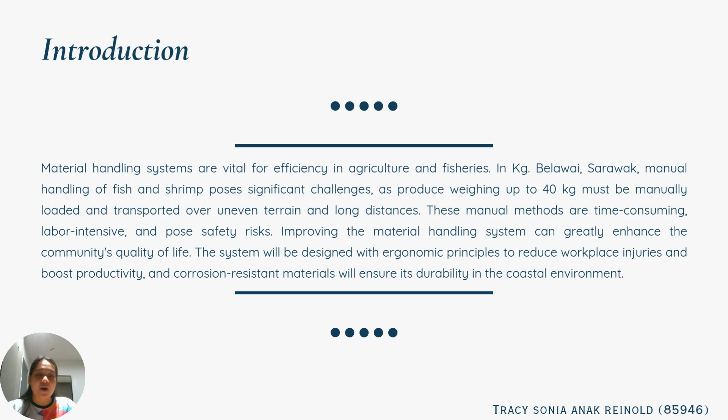The system will be made with strong, corrosion-resistant materials to handle the tough coastal environment, making it long-lasting and cost-effective. It also meets food safety standards, so the fish and shrimp stay fresh and clean. In the end, this project is about improving lives, protecting the environment, and supporting the community's economy.

In the analysis phase, we assess the current manual handling process for fish and prawns in Kampong Belawai, Sarawak. Workers face challenges like uneven terrain, long distances, and height differences. These problems reduce productivity, increase the need for labor, and create safety and hygiene concerns.

Next, we move to the strategy development phase. Our goal is to design a semi-automated material handling system to transport marine produce from boats to processing plants. To keep it sustainable and affordable, we chose cost-effective and eco-friendly materials for the design.

Finally, in the implementation plan, we propose developing a wagon to carry fish and prawns from the jetty to the processing center about 250 meters away. This wagon will integrate semi-automated and ergonomic solutions, making the process smoother, safer, and more efficient. The system will not only improve productivity, but also enhance worker safety and reduce the physical strain involved in transporting marine produce.

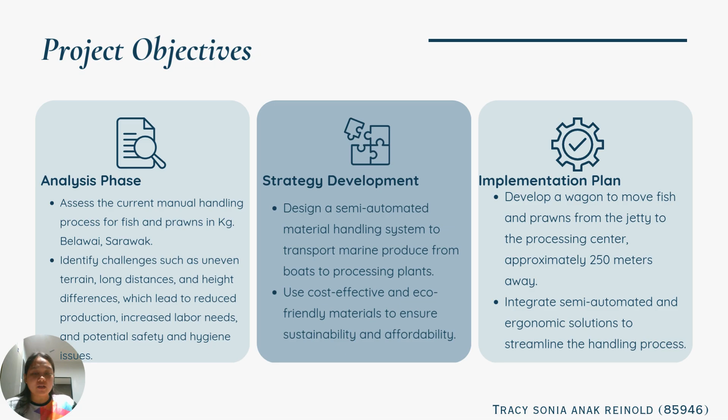So now let us proceed to the force analysis of the wagon. This is the calculation of force applied that we need to move the wagon. Based on the calculation, we need to do three different types of calculation based on three different types of surface: sandy surface, concrete surface, and tar surface.

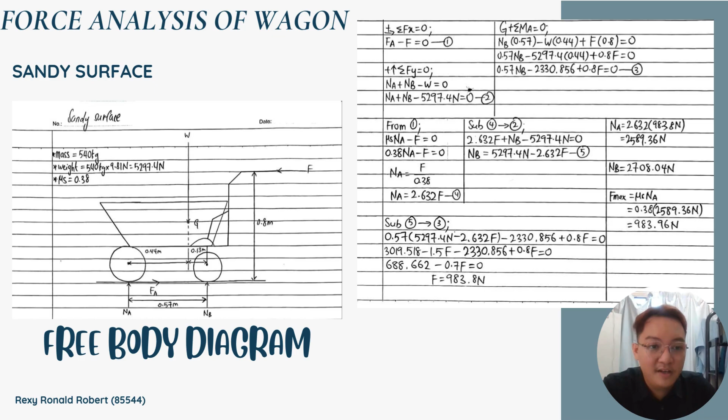After getting the force applied, we can calculate the normal force on point A and point B. We also need to calculate the maximum force applied, using the formula coefficient of friction times normal force at point A. Based on engineering theory, if the force applied on the wagon is lower than the maximum frictional force, it cannot overcome the tendency of the wagon to remain static. So for sandy surface condition, the wagon is unable to overcome the maximum frictional force, hence it will have trouble to move.

Now let us proceed to the concrete surface calculation. By using the same formula and steps, we calculate the concrete surface by changing the coefficient of friction to 0.9. We can see that the applied force is indeed higher than the maximum frictional force. So for concrete surface condition, the wagon is able to overcome the maximum frictional force, hence it will have no trouble to move.

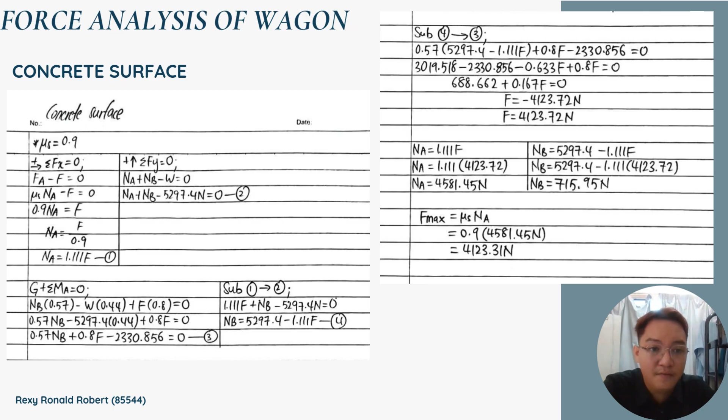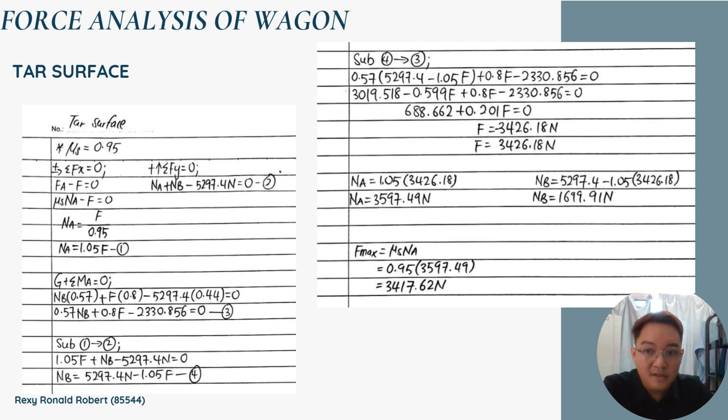Lastly, for the tar surface, same as before, we use the same calculation and formula, but change the coefficient of friction to 0.95. Same as the concrete surface, the applied force on the tar surface is indeed higher than the maximum frictional force. So for tar surface condition, the wagon is also able to overcome the maximum frictional force, hence it will have no trouble to move.

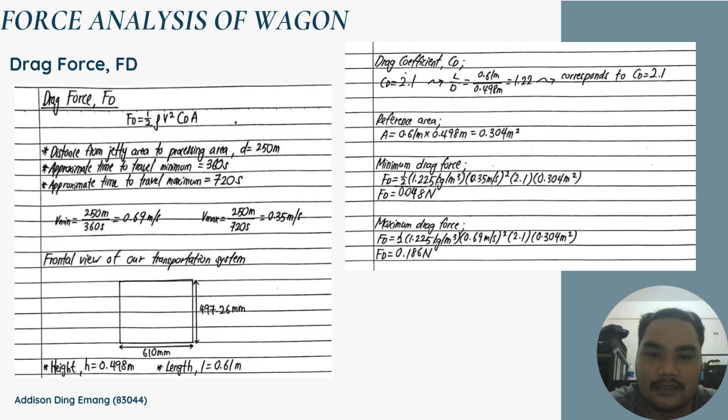We can look for the corresponding drag coefficient of our wagon from the dimension of the frontal area, which is 2.1. We can calculate the minimum and maximum drag force using the formula Fd equal to 1 over 2 rho v squared Cd A. The minimum drag force is 0.048 Newton, whereas the maximum drag force is 0.186 Newton.

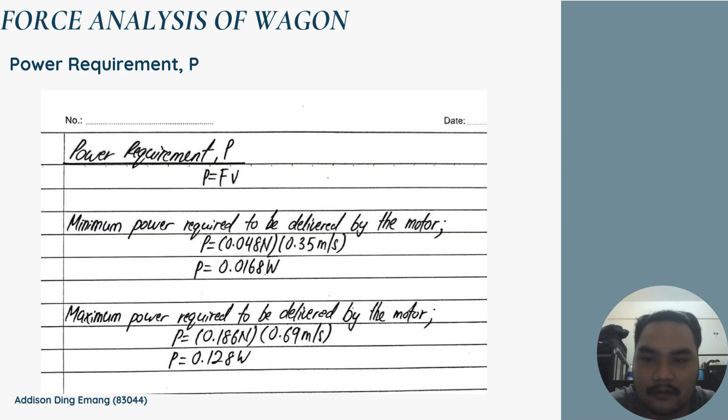Since we are going to install an electric motor for our wagon, we need to calculate the power requirement. Using the formula P equal to Fv, or power equal to force times velocity, the minimum power required to be delivered by the motor is 0.0168 watt, whereas the maximum power is 0.128 watt.

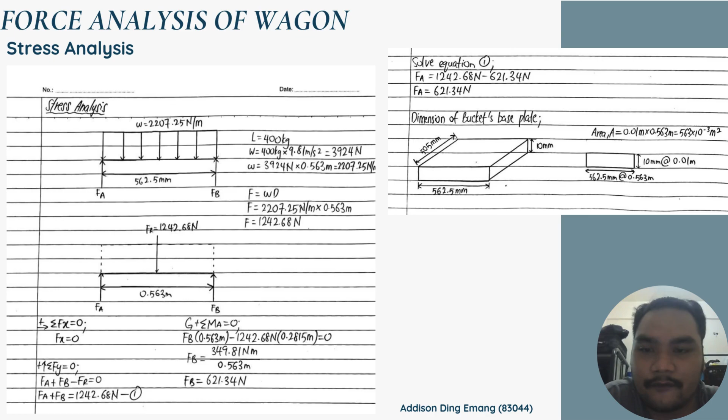So the force is 1,242.68 Newton. Using equations of equilibrium, we can look for the corresponding force at A and B, which is 621.34 Newton. And now calculating for stress, we just divide the force with the area, and it is 2.21 kilopascal.

Since the bucket is decided to be made of aluminium 2014 T6, the yield strength is 414 MPa. The group decided the safety factor of the wagon is to be 2. So we divide the yield strength with the safety factor, and we get 207 megapascal for the working stress. Since the stress is less than the working stress, the design is safe to be used.

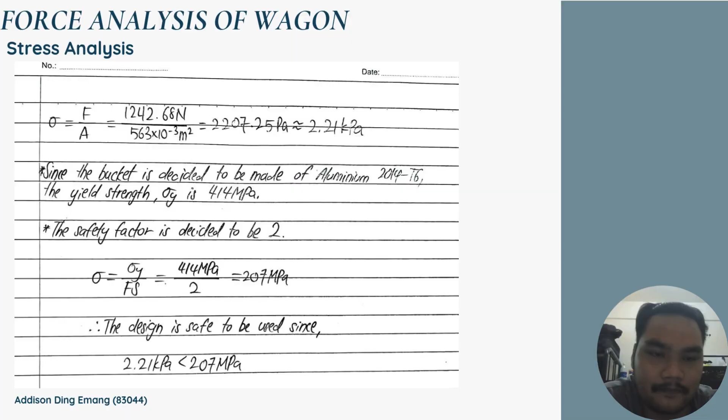The TRIZ diagram and component analysis focuses on identifying and analyzing the components of the material handling system and their interaction with the external environment. The system components consist of the wheel, wagon bed, handle, motor, and frame, which form the essential parts of the material handling design.

Each of these components plays a critical role in ensuring the system functionality. For example, the wheel is essential for mobility, the wagon bed supports the load, the handle provides control, the motor offers power for automation, and the frame provides structural stability. These components work together to achieve the overall goal of efficiently transporting loads.

The external elements or environmental problems that affect the system performance are represented by the supersystem components, which include moisture, sand, roads, and rain. For example, moisture and rain can cause corrosion or reduce the durability of components, while sand and uneven roads can increase resistance and impact mobility.

The interaction between the system and the supersystem components highlights the need for a robust and adaptable design. Finally, the product represented as the load is the ultimate outcome that the system aims to transport effectively. The diagram emphasizes the need to align the system components with the external factors to ensure safe, efficient, and durable load handling under varying environmental conditions.

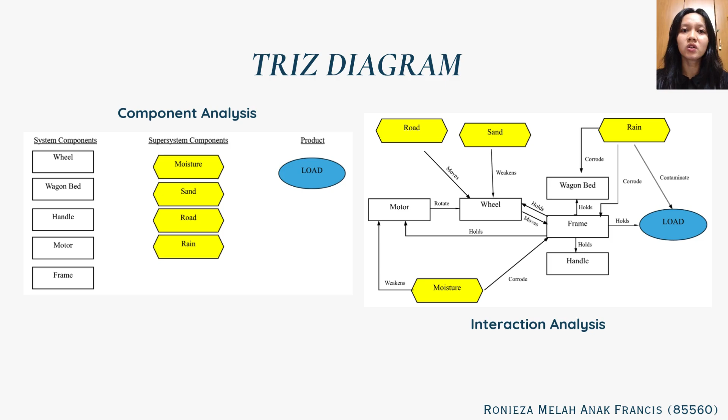This analysis provides the groundwork for creatively enhancing the material handling system by choosing suitable materials, optimizing component design, and addressing outside obstacles.

This diagram illustrates the functional relationship and potential weaknesses within a wagon system, highlighting both useful and harmful interactions. The system consists of key components such as the motor, wheel, frame, handle, wagon bed, and load.

The motor rotates the wheel, enabling movement, while the frame holds the wheel, wagon bed, and handle. The load is supported by the frame.

External factors like road, sand, moisture, and rain impact the system efficiency. The road facilitates movement, while sand weakens the wheel. Moisture and rain introduce corrosion risks, affecting the wagon bed, frame, and load. Excessive moisture weakens the motor, while rain contaminates the load.

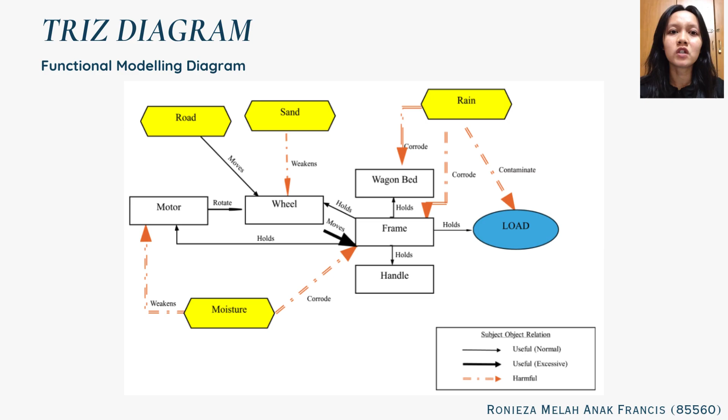The diagram differentiates between normal useful functions, excessive useful functions, and harmful effects using different line styles and arrow indicators, providing a clear visual representation of the system limitations.

Next, the diagram presents a structural breakdown of why the wagon's load capacity cannot be sustained. The root causes are divided into 4 key issues: frame breakdown, wheel failure, wagon bed instability, and motor inefficiency. Frame breakdown occurs due to weak structural integrity or excessive vibration, which may stem from an insecure frame that does not conform to other components.

Wheel failure is attributed to an insufficient number of wheels to support the load and the penetration of small particles into wheel bearings, impairing performance. The wagon bed is unable to sustain the load due to a lack of structure, sturdiness, and excess water accumulation with the produce.

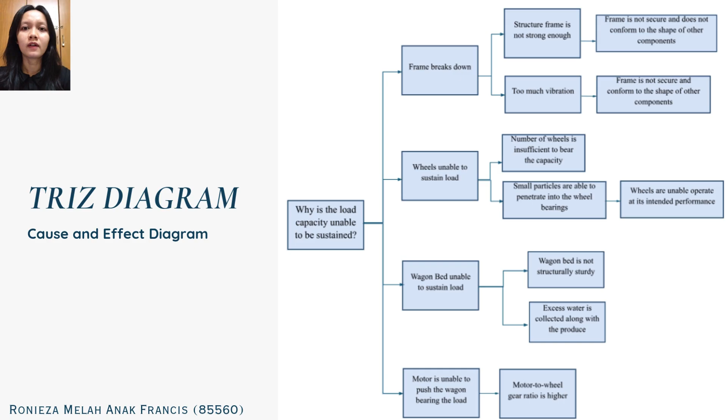The House of Quality (HOQ) diagram is a systematic tool used to translate customer requirements into technical features for a product or system. In this particular HOQ diagram, the focus is on designing an efficient material handling system that aligns with the needs and expectations of customers while addressing technical constraints.

These requirements were prioritized based on customer input, with the highest priority given to the product's dimension, followed by cost efficiency, weight, and robustness. These priorities guide the development process to ensure the design meets the most critical customer expectations.

The technical requirements, Room 2, provide a set of measurable attributes, including the product's dimension, weight, life cycle, cost efficiency, eco-friendliness, and resistance to corrosion. These features are directly linked to customer requirements and serve as a foundation for the design process. Each technical requirement was developed to ensure the system performs optimally under varying conditions.

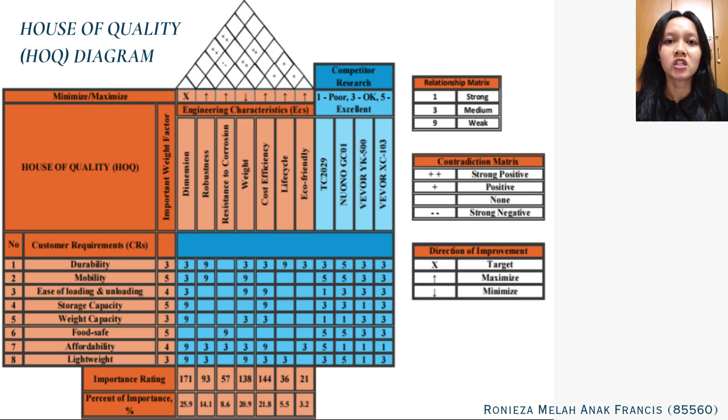The prioritization of features such as dimension, cost efficiency, and weight ensures the final design is robust, cost-effective, and adaptable to various environmental challenges. After reviewing all 5 designs, we have chosen Concept Design 1 because it offers the best combination of simplicity, reliability, and practicality.

The straightforward design means it's easy to manufacture and has fewer parts that can fail, making it reliable for daily use. It's also low maintenance, with quick, simple repairs that don't require special tools.

The design is stable, even when carrying heavy loads, which is great for uneven terrain. Plus, its lightweight structure makes it easy to handle, even in tight spaces, ensuring it's usable in different environments.

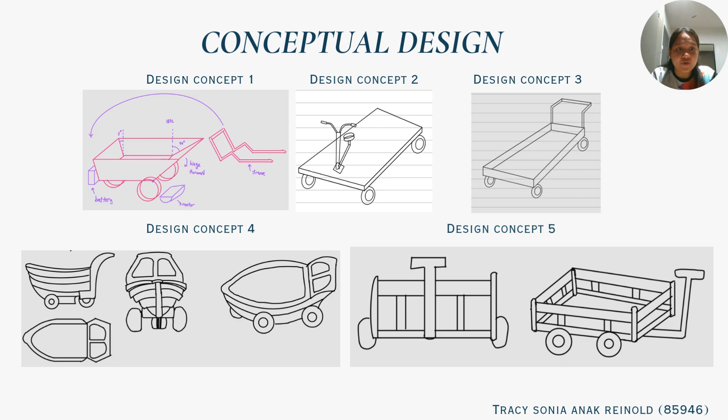While the open structure does expose the load to weather, this can be managed with covering or containers. Overall, Concept Design 1 stands out for its ease of use, stability, and reliability, making it the best choice for our needs.

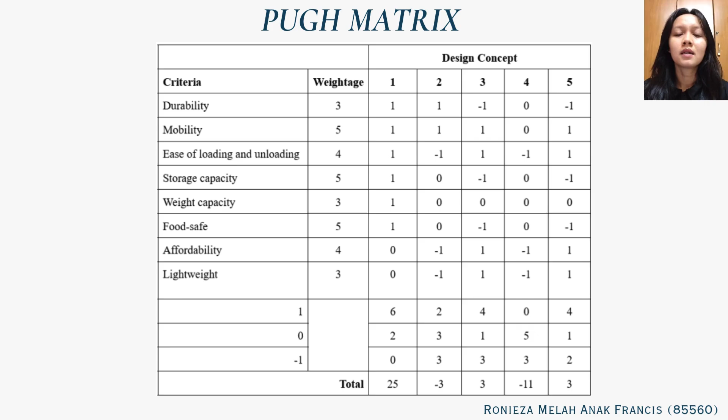From the analysis, Design Concept 1 is the best choice as it outperforms other alternatives in most criteria, making it the most optimal selection for further development. Although Design Concept 3 and 5 perform reasonably well, they may require certain refinements. Meanwhile, Concept 2 and 4 are not recommended as they have negative performance scores, indicating they do not meet the desired requirements effectively.

So as an overview, the final design is a motor-assisted wagon that operates similarly to a wheelbarrow, whereby it is designed to be pushed from the back by an operator.

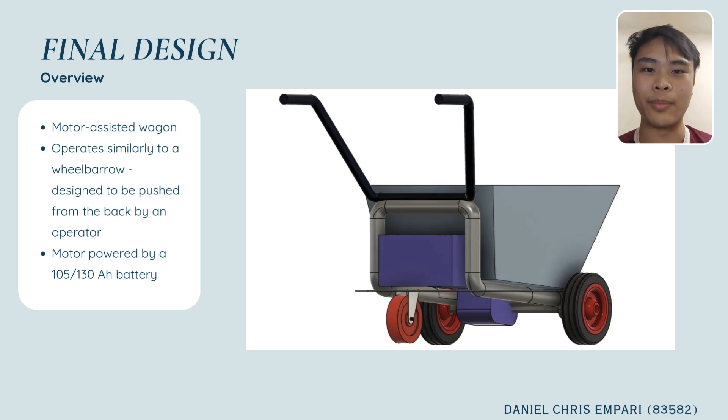To enhance its usability and efficiency, the wagon is equipped with a motor powered by a 105Ah or 130Ah battery, which significantly reduces the physical effort required to push the load.

The material used for the bucket is aluminum alloy, coated with Teflon or PTFE, which prevents water and other liquids containing hydroxyl and oxygen from being absorbed, allowing the bucket to be rated food safe.

The frame of the wagon is made from mild steel, ensuring the durability and strength required to handle loads of up to 500 kilograms, while maintaining structural stability.

Loading and unloading operations are streamlined with a front loading and tilting mechanism, where upon reaching the destination, the wagon employs a forward tilting mechanism hinged at the front, allowing the bucket to be tilted smoothly. This mechanism enables fast and safe unloading of the produce without causing damage and spillage, ensuring the produce remains intact. It also minimizes physical strain on the operator, making the unloading process both ergonomic and efficient.

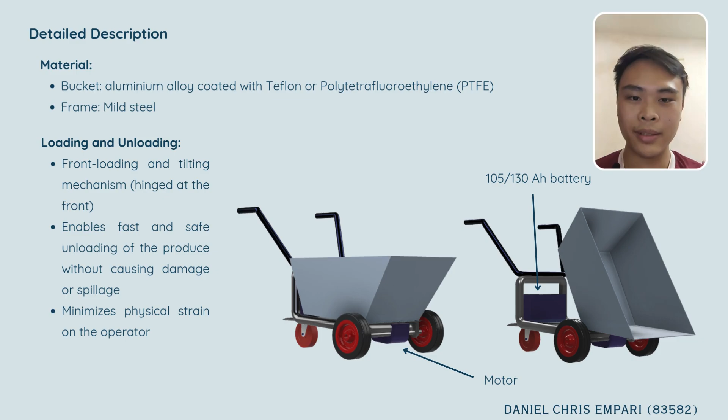Here you can see where the motor and the battery is placed. The battery is placed just below the handlebars to act as a counterweight, and the motor is placed next to the front wheels to move the front wheel.

The wagon's mobility system includes a handle fixed to its frame and a swiveling caster mechanism, which allows for easy maneuverability, especially in tight corners. The motor is attached to the front wheels, which assists in moving the wagon effortlessly, even under full load, ensuring smooth operation across the operated terrain, which includes sandy, concrete, and asphalt terrain.

The storage capacity of the bucket is designed to hold up to 500 kilograms or a volume of 180 liters, which exceeds the 141 liters required to carry the 400 kilograms of shrimp. This ensures the wagon can handle its intended load efficiently without compromising on performance.

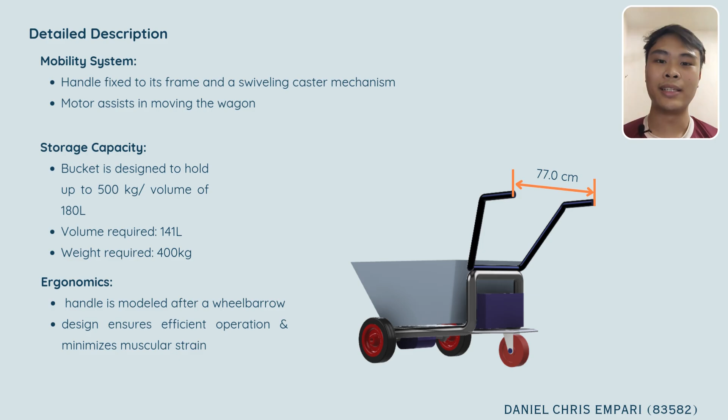In terms of ergonomics, the handle is modeled after a wheelbarrow, and this design not only ensures efficiency in operation but also minimizes muscular strain for the operator, allowing extended usage without discomfort. The wagon's combination of ergonomic design, motor assistance, and ample storage capacity ensures that it meets both functional and user-friendly requirements. Here is a detailed illustration of the final design with units of measurement in millimeters.

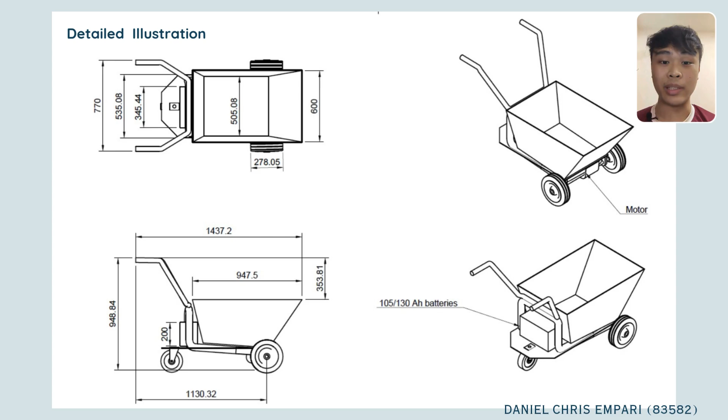Among the advantages of this design is that it is motor assisted. This system reduces the physical strain of the operator, making it ideal for long distance transportation. The use of Teflon coated aluminum alloy ensures corrosion resistance and hygiene, extending the wagon's lifespan.

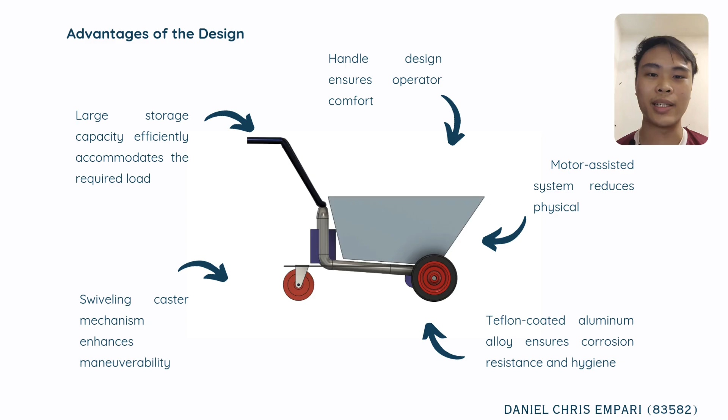The swiveling caster mechanism enhances maneuverability, making it easier to navigate tight spaces, while the large storage capacity of the bucket efficiently accommodates the required load of 400 kilograms. The ergonomic handle design ensures operator comfort even during prolonged use.

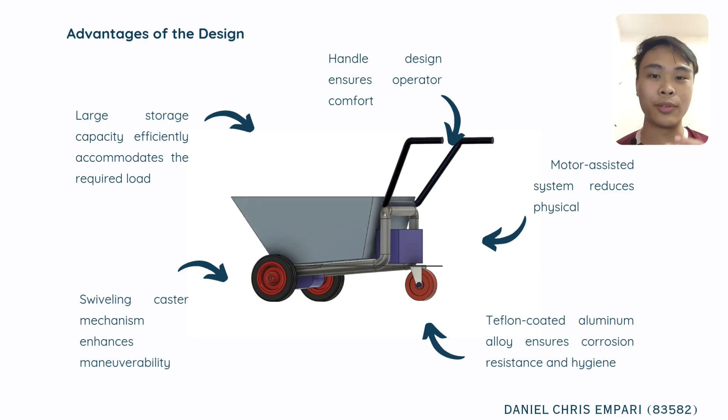Overall, the final design is an effective solution that combines functionality, durability, and user convenience.

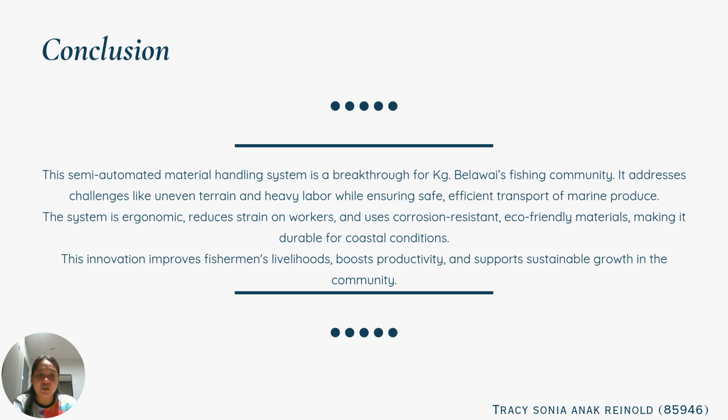This semi-automated material handling system is a breakthrough for Kampong Belawai's fishing community. It addresses challenges like uneven terrain and heavy labor while ensuring safe, efficient transport of marine produce. The system is ergonomic, reduces strain on workers and uses corrosion-resistant, eco-friendly materials, making it durable for coastal conditions. This innovation improves fishermen's livelihoods, boosts productivity and supports sustainable growth in the community.